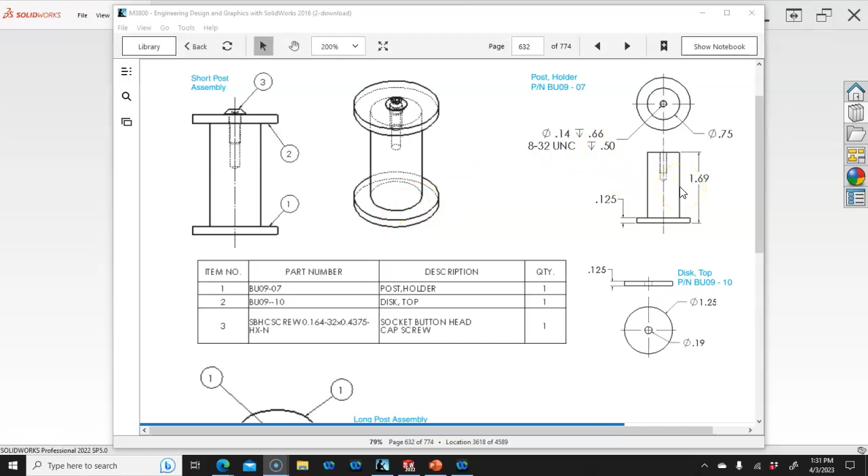For the post holder, we have the short post at 1.69, 1 11/16, familiar with fractions, and 2 3/8 for the long, which is 2.375 rounded. Let's see, what would that one be? 6.875, so just running through some numbers.

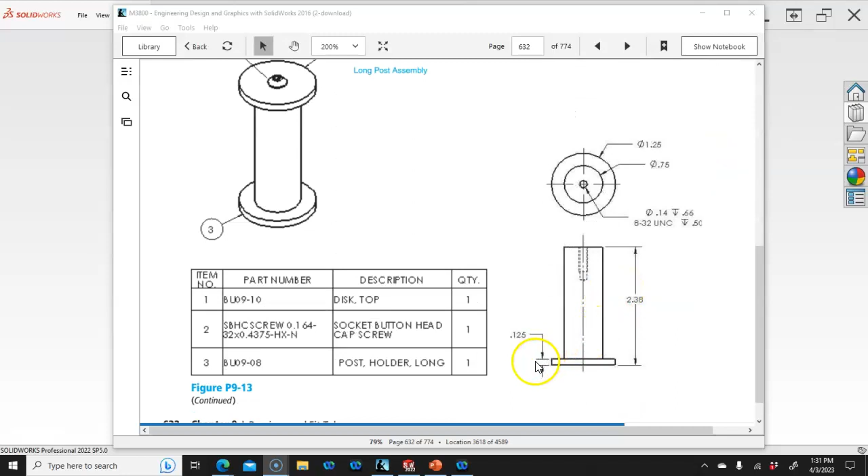1/8 inch on the base, and then the thickness on the top.

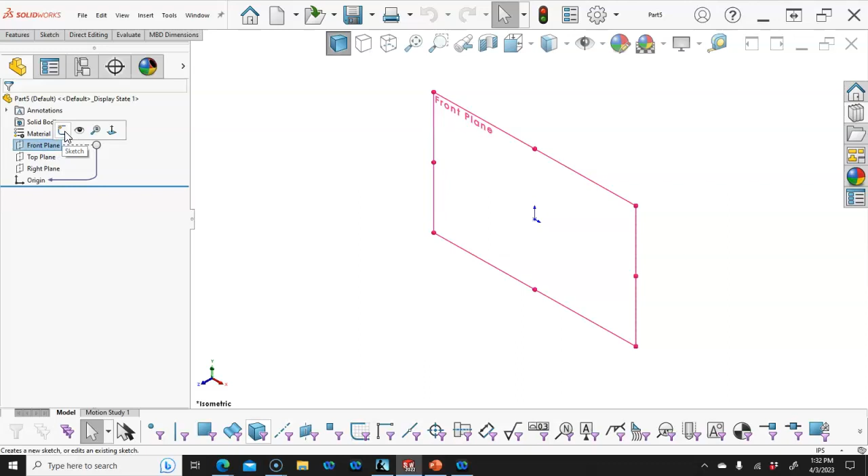8-32. So we're going to go with save as and open first. I think it's going to be a little quicker to do the cylinders and extrude up, but we have more control with the revolve.

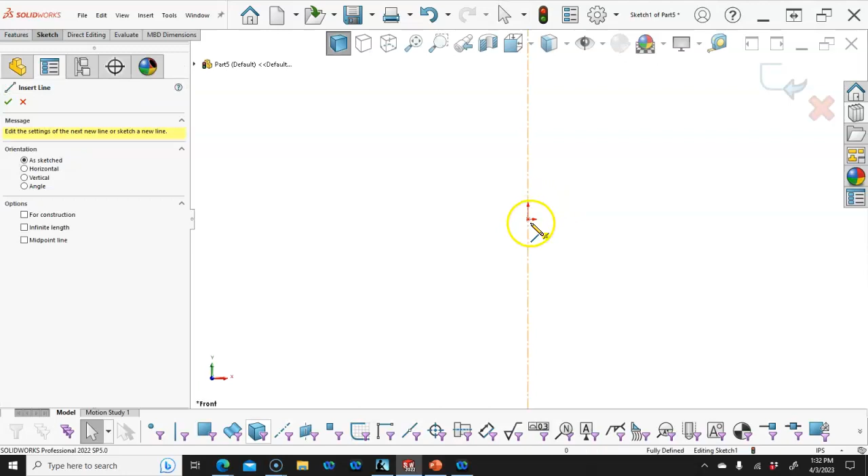So if I do an infinite length vertical, and then the line command, and we'll make sure to close that off.

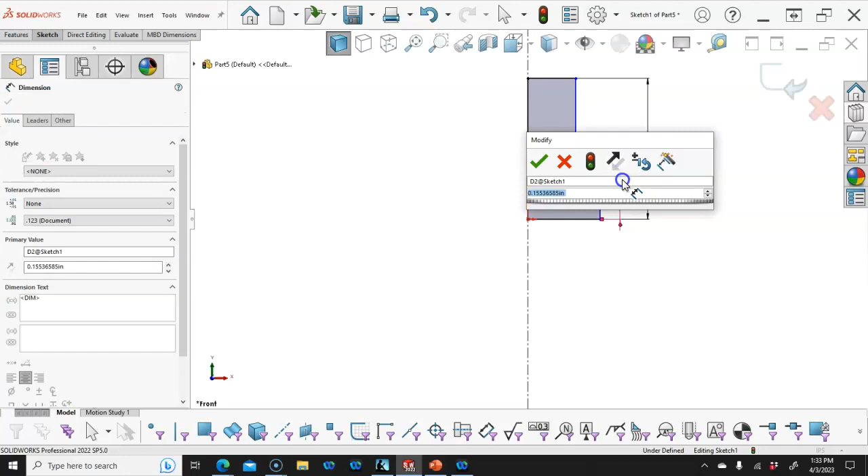Have the length, so 1.69, 0.125. When we go through the design for manufacturing now, it'll be interesting to look up at these stack up tolerances. So go 0.75.

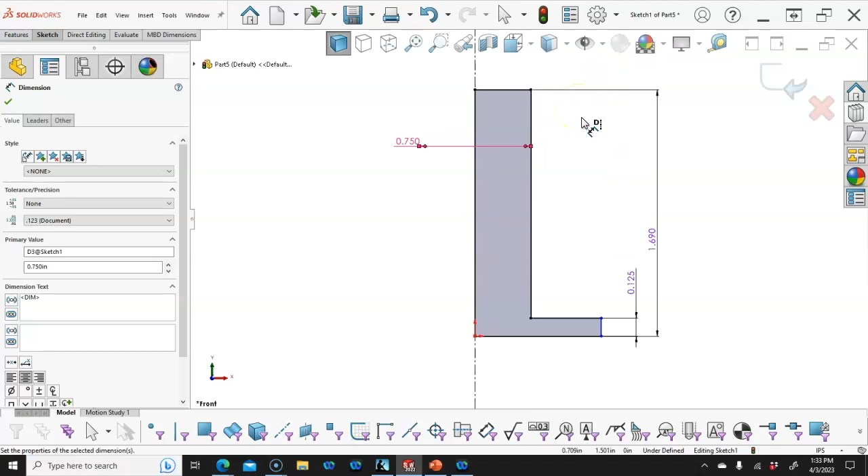And then we have 1.25 for the OD. Okay, into the features, perform the revolve.

360 degrees, pick the top face, go into the hole wizard, and in the section view they show those pretty deep. So the one is called out on the long, the 8-32 is called out 0.66 and 1/2 inch.

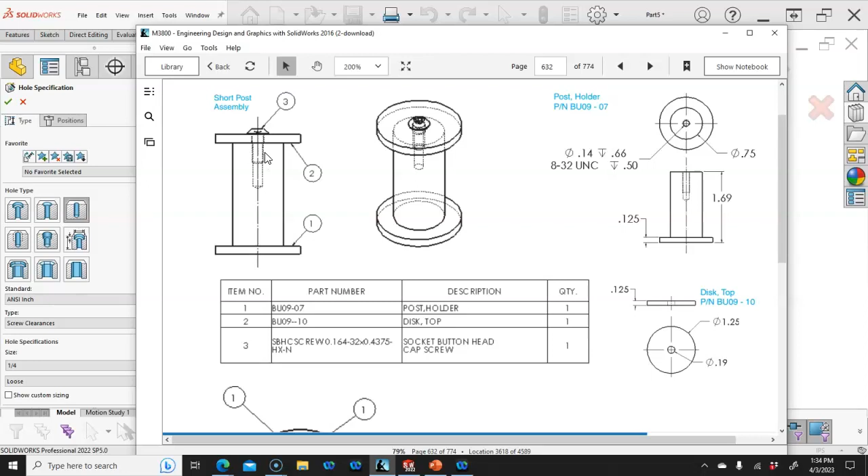And that one has, in the assembly view, the screw in it. So they've done kind of what I would say is a general recommendation: make sure that you have more thread than you need for the fastener. If you don't have one that length, then you can always go a little bit longer.

So we're going to go to the threaded hole, find our 8-32, and we said 0.66. If we put in the thread depth of 0.5, it gives us a little bit, but 0.66 is okay.

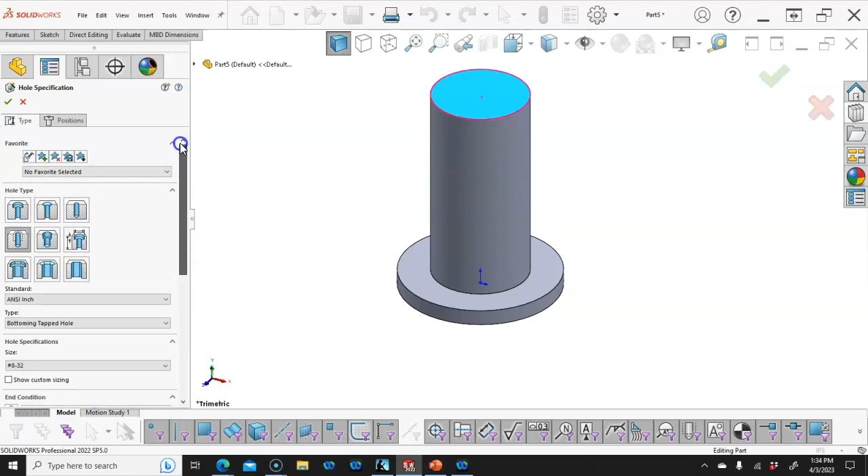And positioning it, we'll go to the origin, accept. If we look at that from the front, then we have plenty of depth. Alright, so we're going to save.

And this was the post holder. Not quite sure why they reversed those, but let's go with it. This will be the short.

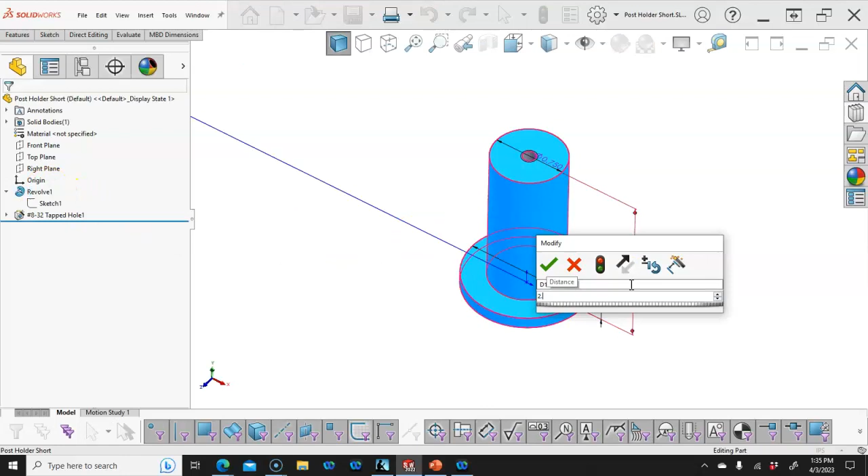2.38 for the long, make sure to rebuild it. File, save as. All right, that's always the risk of changing that prior, is that...

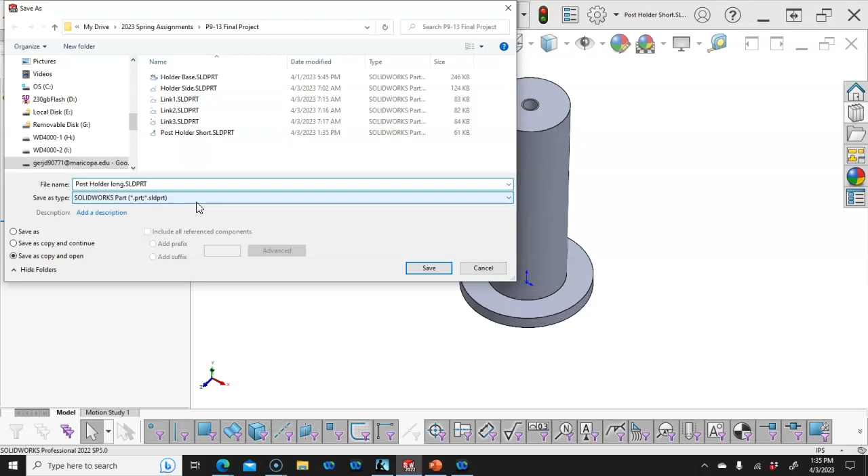If I happen to forget, I usually end up overwriting the one that I wanted to keep. So we go long, I guess we'll go back and capitalize that. Alright, doesn't really need to, so new.

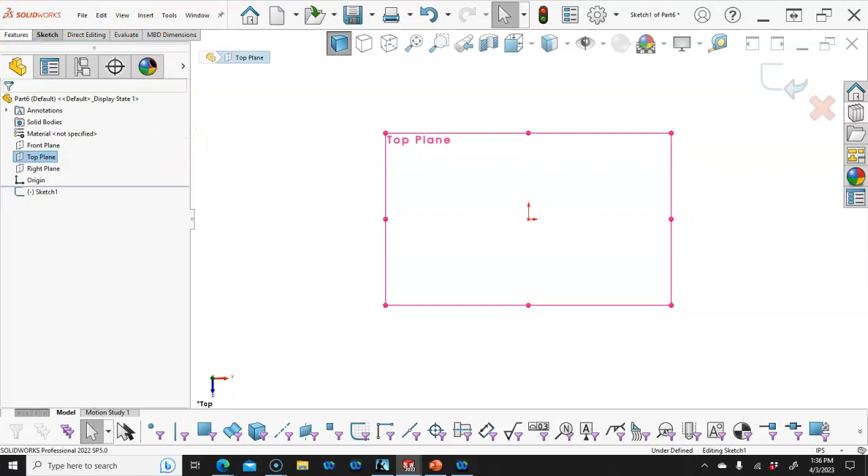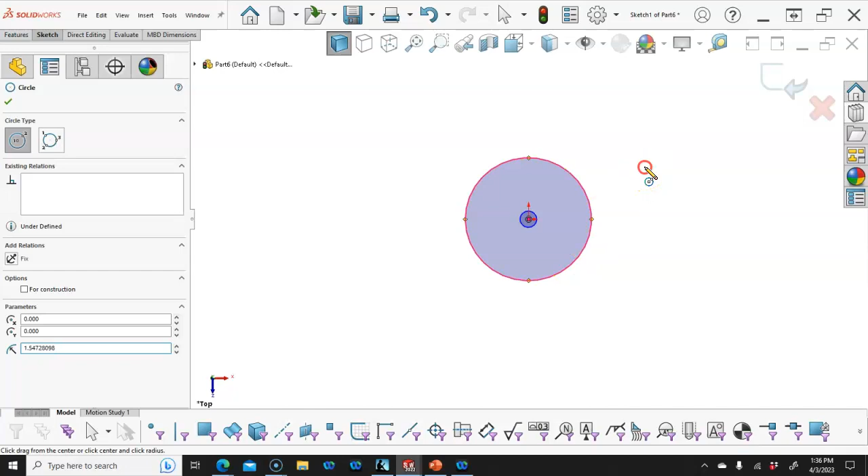And we need the clearance hole, so keeping it in the same orientation. Circle, clearance hole, what did they give us? 0.19. Usually would be about 170, about 170, 177, 19 for the clearances.

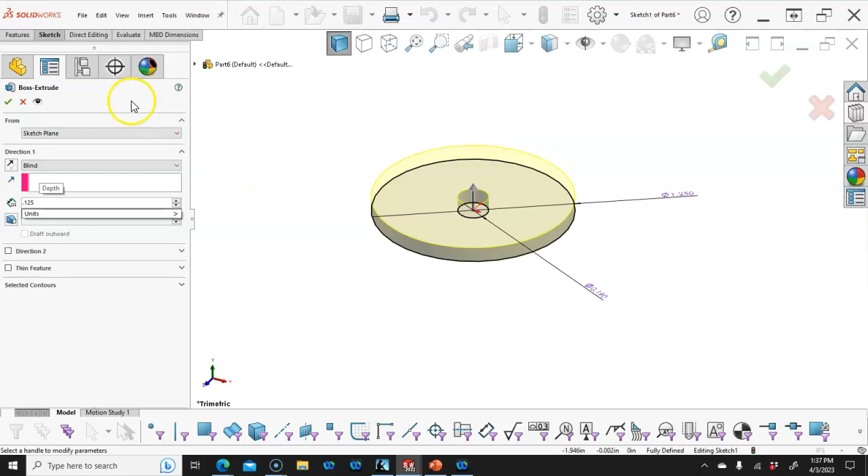We'll go ahead and include those. 1.25, 0.19, extrude. All right, so we're going to have 0.125 on the disk. And we'll save this as the disk top.

So at this stage, we haven't done much in the way of a subassembly, so really the only thing that makes this a subassembly, and even configurations, in the assembly. So if you build this and the next steps and don't want to mess with this assembly step, you can put these together individually, and there's looks like 2 of the short and 2 of the long, so it's just a few extra steps.

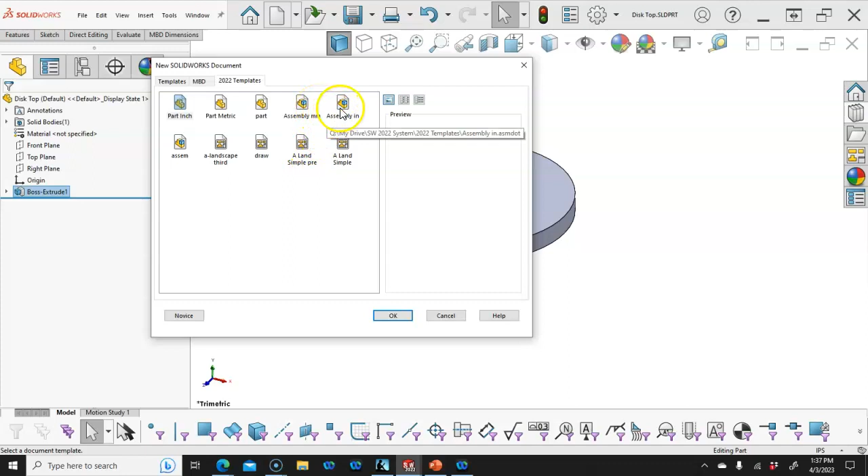But just to tie these points together, we're going to go assembly inch, and I'm going to bring the disk top in as my base piece, and then let's go ahead and save.

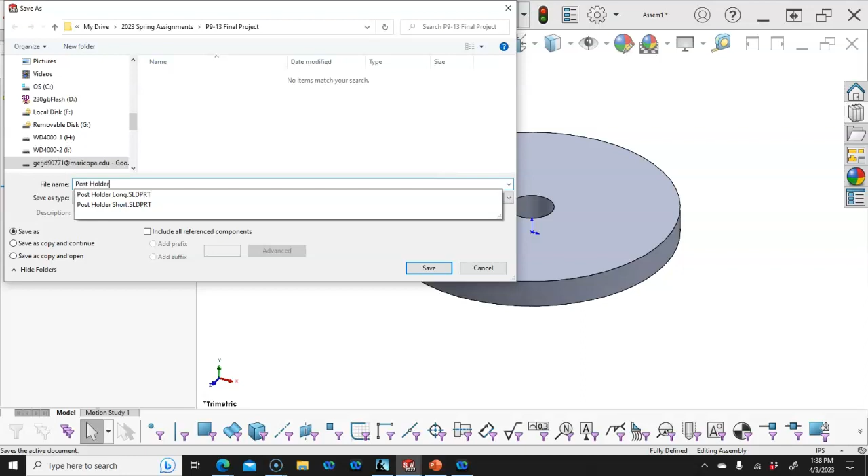Post holder. Alright, so when I bring in the next, we have to decide what the default is. Well, the default, if we're going to set these up as a configuration, is to just go ahead and leave that. Create the short.

And if I'm going to go with the naming, and let's pull the configuration name. This looks a little bit different.

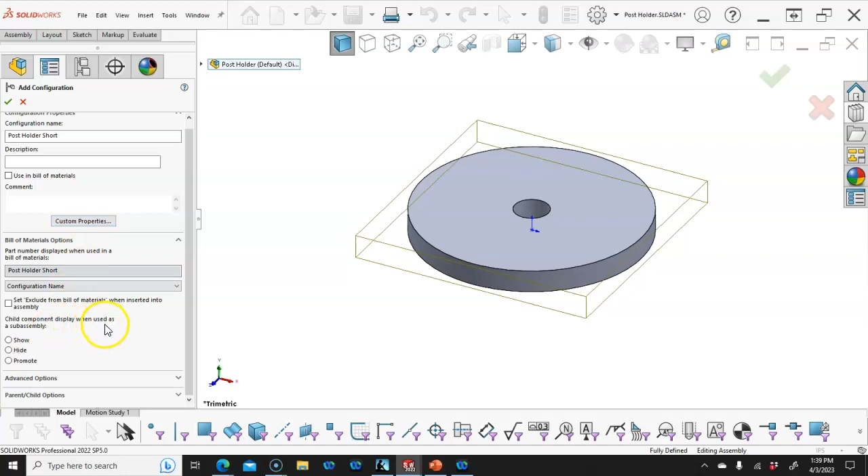I'm going to have to check into child component display when used as a subassembly, have to see what that does. Alright, so go ahead and accept it.

We're going to insert the next component, bring in the short, and that looks like it did what I didn't want it to do anyway. So if we need to correct it, I think I got ahead of myself, and we can double click.

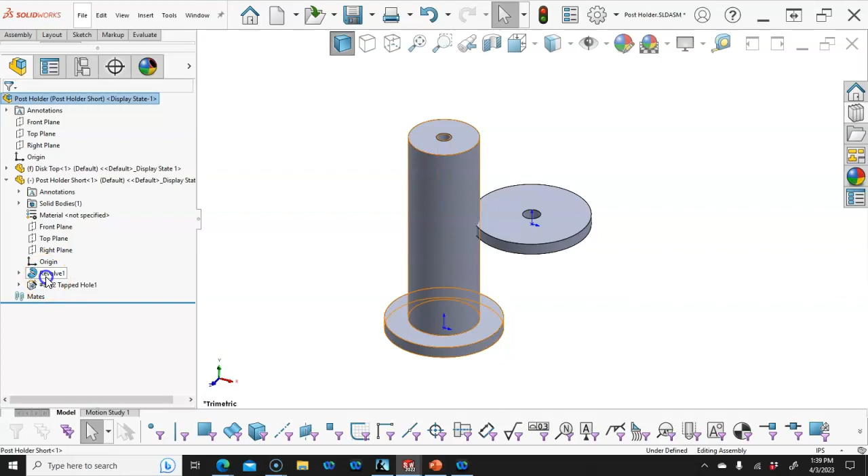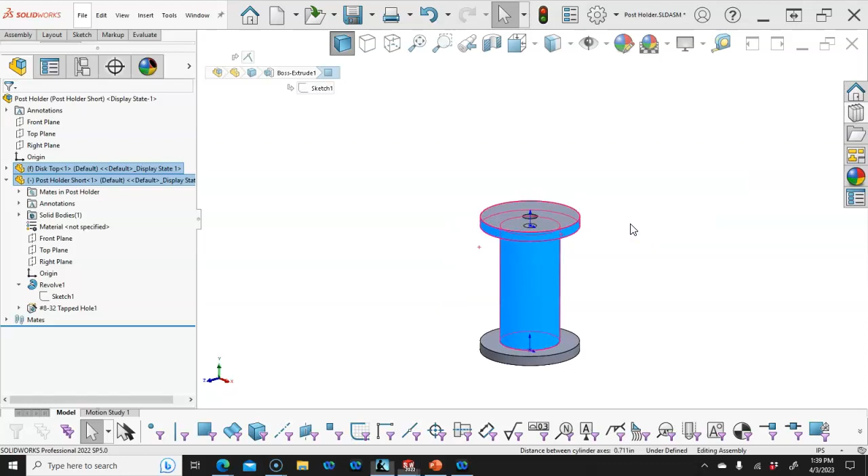So concentric, watch for the pop-up, and we're going to lock the rotation. And then it doesn't, I was checking on the bearings for the rest of the assembly, so that is up.

We have the bolts and screws. If it was not, I would do the add-in now and activate the toolbox. We want socket head screws, button head.

We're going to drag and drop to that location. And based on the depth, we're going to go with a 1/2 inch. They did 7/16, but 7/16 is kind of a weird number.

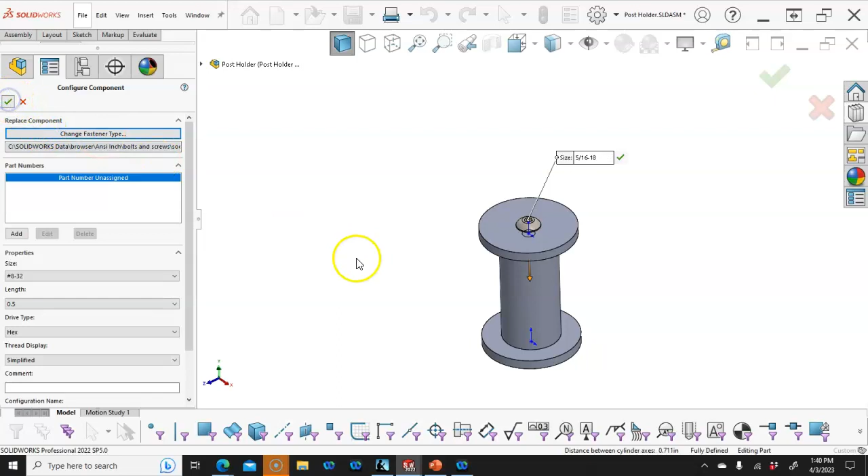I would tend to, if I looked in the catalog, there's probably only a little bit of difference in the cost of the length, but what we'd have to watch out for is that sometimes the inner fractional sixteenths, you might get 50 for $1 less and 100 for $1 more. So if we're doing cost analysis, we just want to be aware of those.

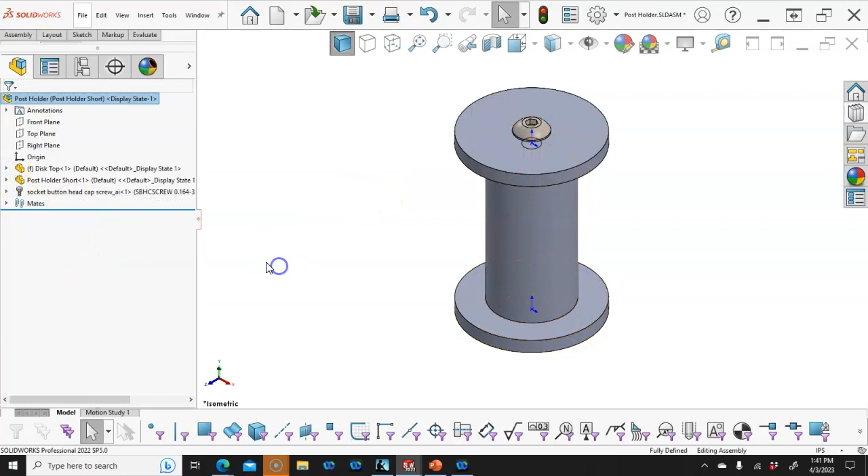Alright, so I go back to the default. That's active, so I did not suppress. So we can suppress that guy out. It's still underdefined. I thought I got that.

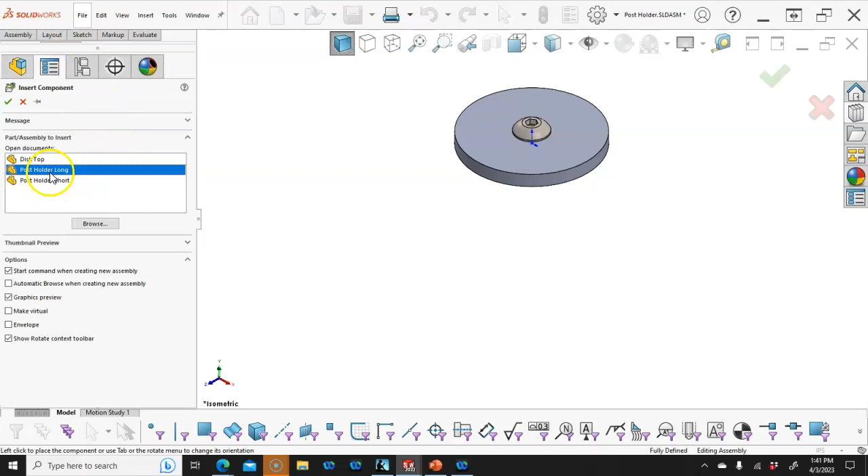Rotate. So let's bring in the long. So somewhere I did manage to save that. Alright, so coincident.

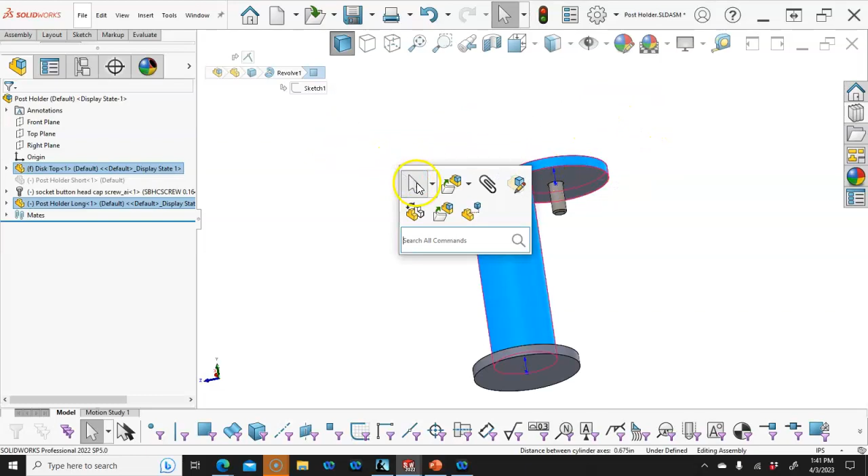Want to watch for that little box because that would flip the mate alignment, turn this the other way. Alright, so I missed the pop-up, so we'll go with concentric, lock rotation, hit OK, and then we need to double check what was going on.

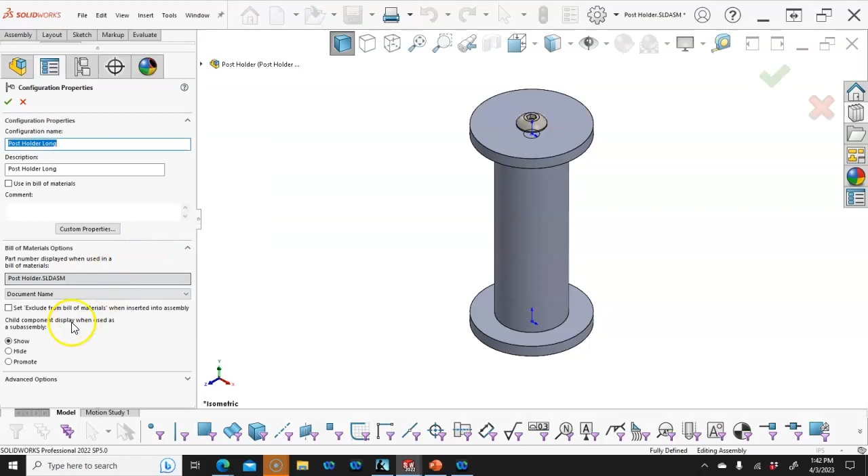And actually, I was going to make that the post holder, and then if we need to, since that popped up, notice we got the brackets, that's the name that's going to be on the bill of materials. And we go back to the properties, and I change that to configuration name. And we go ahead and save it.

Alright, so double click or show, and then we can suppress.

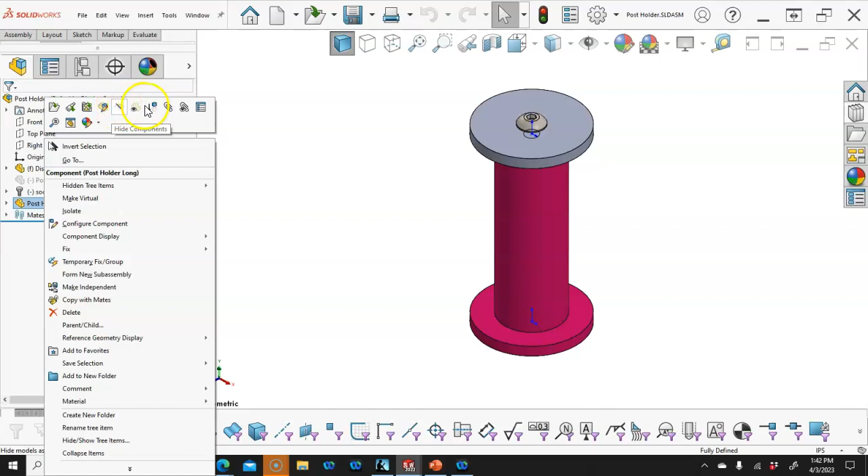Alright, so the base, just going to reorder that a little bit. So I have the disk top as the default and the screw, and then the long and the short, and that one's still showing up.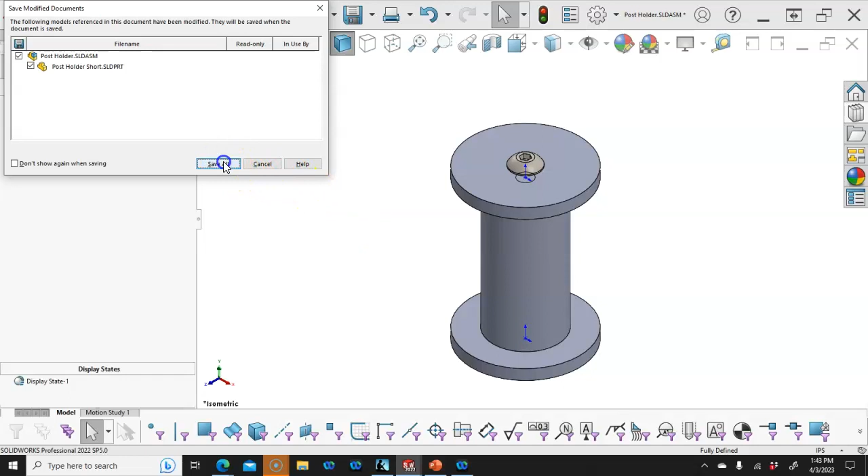So one of the reasons we go through is I thought I had everything lined up and organized the way I want it, but we want to check those configurations as we create them. Alright, so that gives me now a single file that I can drag and drop into the assembly as we go, and the post holders will both be available to select out of this one file.